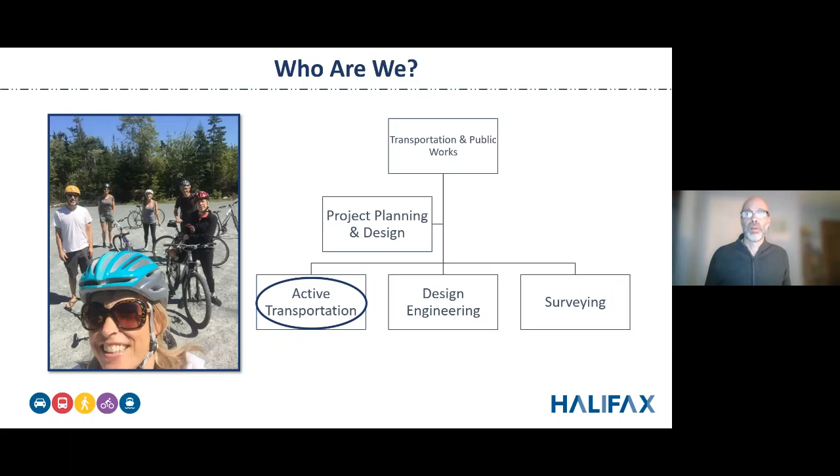Most of our work is directed by regional council. We take our direction from them, and a lot of the actions we're working on right now are recommendations that came out of Halifax's integrated mobility plan. This is a plan aimed at creating a more multimodal city, a city where residents and visitors can get around relatively easily, safely, and conveniently, no matter which mode they choose or that's most convenient for them. The plan really has a focus on sustainability and efficiency, moving our transportation system to become more diverse and sustainable, getting more folks on transit, more people bicycling, more people walking, and making it easier and safer to take those modes.

Just a little bit of description of some of the facility types we're talking about when we're talking about infrastructure that is safer and more comfortable for people to bicycle. This slide gives you the range of facility types, and the engineering design guidance and standards from national transportation engineering organizations have changed quite a bit in just the last 5 years, certainly the last 10, in terms of the types of infrastructure that are recommended and how they're designed.

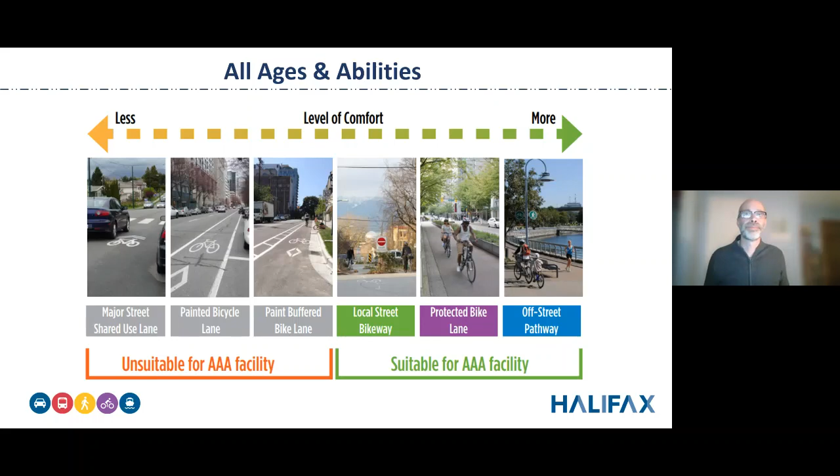Just a few more slides here. Looking at protected bike lanes, we didn't have any of these in Halifax two or three years ago. We are really focusing on getting these types of facilities built on the busier streets in Halifax that are part of our candidate network, and we're trying to do them faster.

One of the ways we're doing them is getting them in on a more, we call it, tactical or temporary basis, using materials like those plastic bollards, sometimes with precast concrete curb, which can go in a little bit faster, is a bit cheaper, and still offers the same level of separation and protection.

In the middle, you have facilities similar to the Hollis Street bike lane and the southern part of South Park, where we put the bike lane in and create that separation using precast concrete curb that comes in and gets placed.

Again, those types of facilities could be there for a while. They're fairly intensive from an infrastructure perspective, but it's an example of the kind of street where, when we come back to do a larger scale rehabilitation of Hollis Street, we would look at changing that arrangement and potentially bringing the bike lane up to sidewalk level or half sidewalk level, and provide the separation that way. But for now, those facilities can be around for a while.

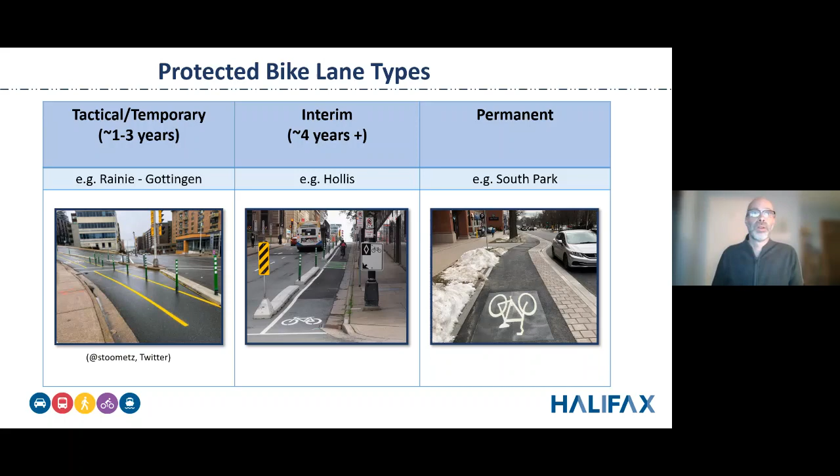Local street bikeways are another facility type that we didn't have any of until recent years, and again these are designed to be safe for all ages and abilities. We have seen them used in other cities, and there's now much better design guidance for them in recent years. The key to these types of facilities is making sure that there are as few cars as possible on the street, so really the types of car use should be just for residents and their visitors. We try to put in measures that dissuade shortcutting vehicles, and also look at traffic calming measures to ensure that the vehicles that are there are going at a fairly slow speed. Looking at intersection crossings is really one of the larger components of these types of facilities.

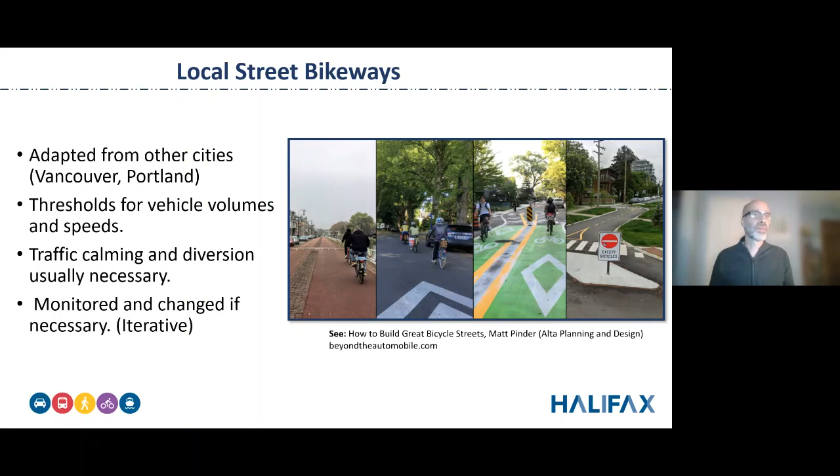So I think this is my last slide. One of our big focuses right now, and a goal and target we have, is to have a network of all ages and abilities bicycle facilities in the regional center, which is the Peninsula of Halifax and Dartmouth, within the circumferential highway. Those green lines represent where we'd like to put the facilities in. About 40% of that network is built now, and I think that's about all I'll say about that one.

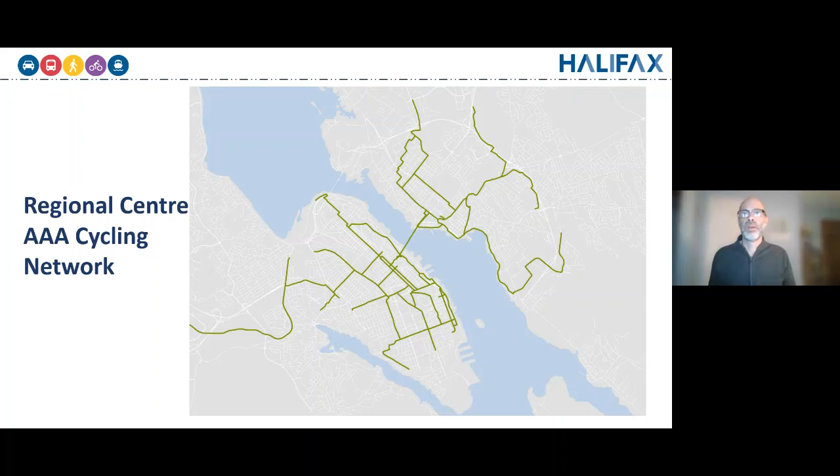You're going to hear a bit about some of the work that Mark Niener's leading to get the southern part of the peninsula planned. And Siobhan Witherby is going to talk about the middle part of the peninsula, the Midtown Bikeways planning process we're working on right now. With that, we're going to get into the meat of the presentation, the more substantive parts. Siobhan Witherby, an active transportation planner in our group, will talk to you about the Midtown Bikeway connections planning process. Thank you very much.

Perfect. Thank you, David. Again, my name is Siobhan Witherby. I am the project manager for the Midtown All Ages and Abilities Bikeway Connections project, co-leading with Mark Niener, who's also on the call here. We're just going to take you through a history of the project to date and where we are now.

Next slide, please. So the objective of the Midtown All Ages and Abilities Bikeway project is to perform functional planning to improve the cycling connections to and through the Halifax Common. This includes upgrading some existing facilities, bike lanes and multi-use pathway facilities, to make them more suitable for all ages and abilities. It includes building new facilities where there are gaps in the network, and also improving the transitions to help move more smoothly through the network. All of this is using a complete streets lens, looking at all road users with a focus on vulnerable road users walking and cycling.

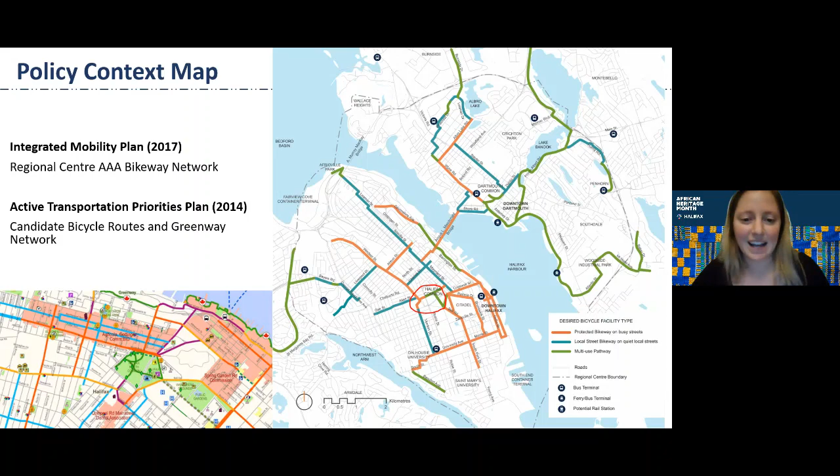So you can see the context of this Midtown All Ages and Abilities Bikeway project. Our focus is on Bell Road, the Commons Pathway, Welsford Street, and Quingate Place, and we have dashed that Quinpool Road connection. So we were investigating whether we needed to enhance one or both of those routes. In yellow are the key intersections for improving the transitions: the intersection of Bell Road, Sackville Street, and South Park; the one of Summer, Trollope and Bell; also Welsford crossing Robie Street and transitioning from Windsor; and the intersection of Vernon, Quinpool, and Quingate.

Just making sure all of those connections are enhanced and allow people to move freely and comfortably through the network. The light blue lines are some of our major existing cycling infrastructure right now: the South Park protected bike lanes it'll connect to, the Vernon Street local street bikeway, the Allen Oak local street bikeway corridor, and also the Windsor Street painted bike lanes. So those are some of our key connections for development. Next slide, please.

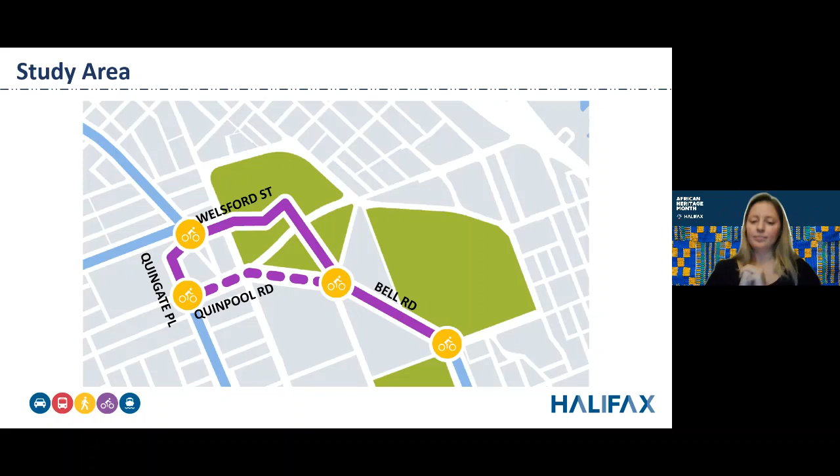So the existing conditions and context, there's quite a range within this center area of the peninsula. There's some on-road routes, some off-road, more recreational style routes, so there's a lot of different context-specific considerations for those.

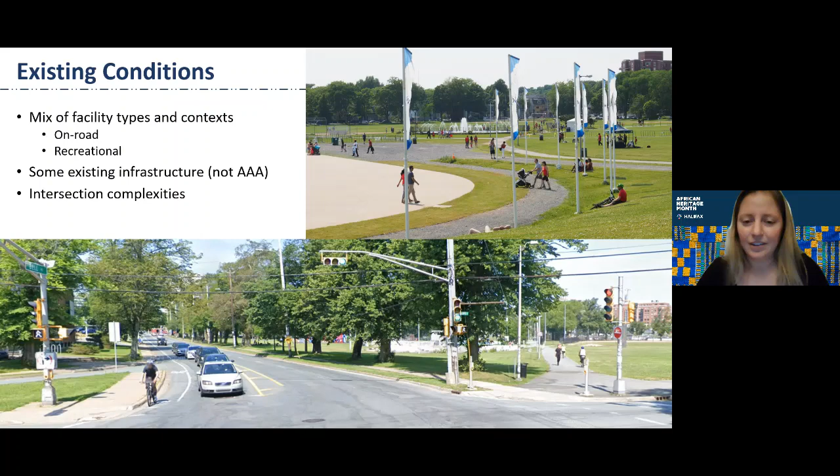There's routes with existing infrastructure, for example Bell Road with the existing painted bike lanes, and then some streets that don't have existing infrastructure, and then considering all of the complex intersections. You can see there are some multi-use pathways that hit a four-way intersection at an angle, and also some offset intersections we need to address.

There are some sharrows on the street transitioning into the local street bikeway context on Vernon. Some very long crossings, like crossing Robie Street to get to Welsford, and the existing multi-use pathway through the back of St. Pat's site. So taking all of these together and coming up with a complete and cohesive plan to move people through this part of the network.

Our key considerations are the type of facility, how we can provide high comfort, low stress, and accessible walking and cycling facilities. Also how we transition between changing types of facilities, getting off a multi-use pathway into some bike lanes, and the considerations for bi-directional versus unidirectional lanes. A lot of these corridors have fairly constrained right-of-way, so we're working with how to fit the desired facilities through there and what some of the trade-offs might be.

We're also considering opportunities to integrate the installation with adjacent developments, for example the QE2 hospital redevelopment site, as well as some sites along Quinpool Road, and addressing those signalized, unsignalized, and offset intersections.

In terms of the project timeline, it was initiated in 2019. We did some existing conditions analysis, stakeholder engagement, and held a public engagement session in the springtime of that year. We've since produced a What We Heard report and have been working a little bit on some more concept development and back and forth with the hospital.

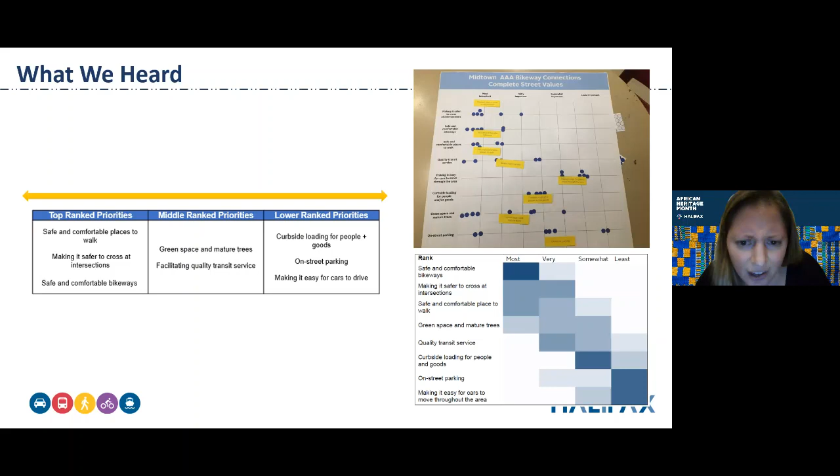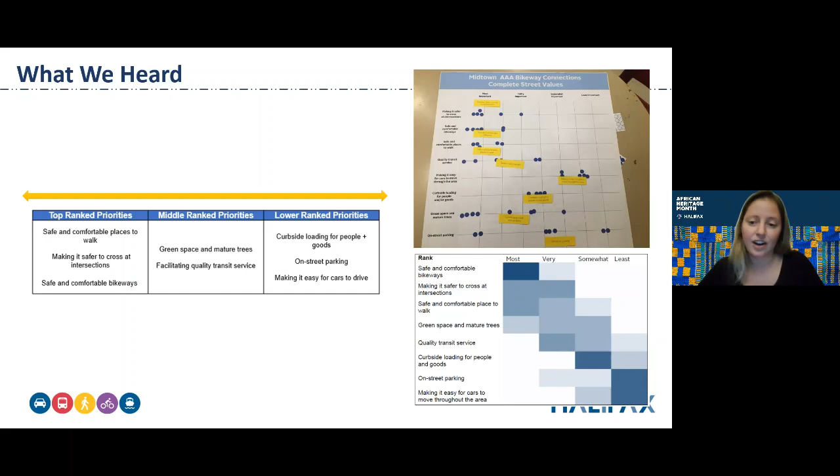In the middle was green space, and then in the lower ranked priorities it was loading and moving goods, on-street parking, and making it easier for cars to drive. So that kind of helps us to frame our weighting and evaluation when we're looking at these trade-offs for the different types of facilities.

We also had some specific questions about folks who are already thinking about the street segments itself and what would make them most comfortable. On Welsford Street, the highest ranked bicycling facility was a bi-directional protected bikeway, and on Bell Road it was unidirectional protected bike lanes.

So we're kind of taking that into account as we develop the concept designs.

When determining whether to do just the Common Welsford route or also add the connection through Bell Road to Quinpool Road, our big question was whether we could make it comfortable enough for people to move through the Willow Tree intersection, which is fairly significant, to a point where they would use it in their daily travel.

We heard from more than half of the folks that they would use both connections, depending on their destinations. That was helpful in giving us the direction to proceed further with planning the Bell Quinpool connection as an alternative route.

Since then, we've been doing some back and forth with Nova Scotia Health Authority regarding the QE2 development. There was a memorandum of understanding signed between the city and the province that designated some extra space on the south side of Bell Road for walking, cycling, and transit. We've been going back and forth with them to see exactly how much space would be available, as that would influence the recommended design for that section.

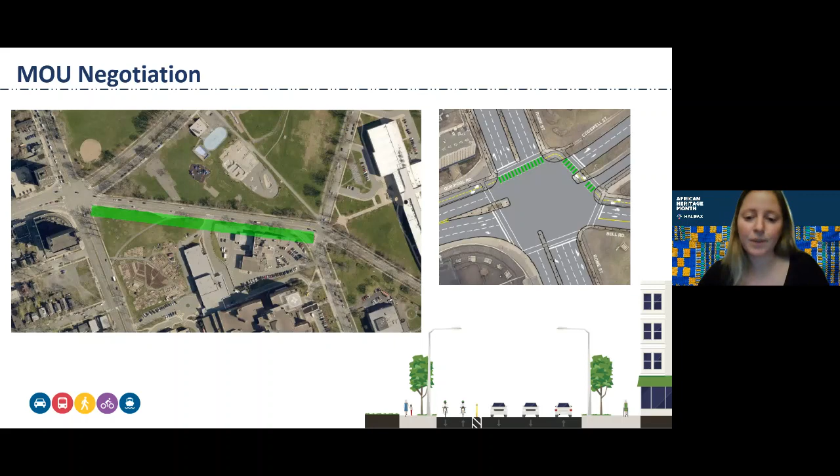In terms of our concept development, you can see on the right some ideas we might be having, but yeah, just developing the bikeway options that balance the trade-offs. We're focusing on the intersections and favoring protected intersections wherever possible, so people can stay on their bikes without dismounting, and can move around the area in as many different ways as possible in a protected way.

We're building on the Halifax Common Master Plan concepts that were just approved by Regional Council, and considering accessibility and incorporating pedestrian improvements.

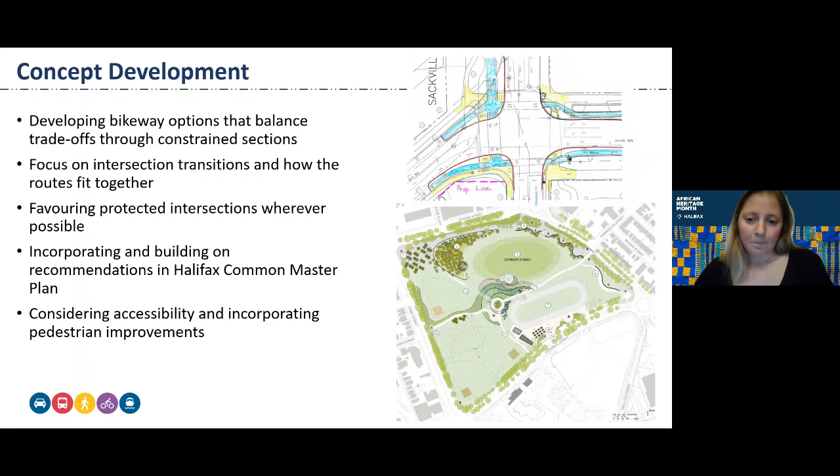Our next step is just finishing up our round of internal stakeholder engagement before we go to the public. Our plan is to host the second round of public engagement in the spring of this year, and then put some concepts on the table for people to look at and choose between options or voice their support if we've captured some of the needs through this area. We'll take that feedback and recommend it to council for implementation.

There are some opportunities to do interim improvements in the meantime. We're looking at the possibility of adding curbs, bollards, paint, and pavement markings to make it safer while we wait for construction of these routes. The permanent implementation is pending council approval.

Because the route is so long and there are a few different sections, there will be a phased implementation, and there are a few moving pieces in terms of integrating with development, especially on Bell Road and Quinpool. So those pieces we may have to wait on timing for.

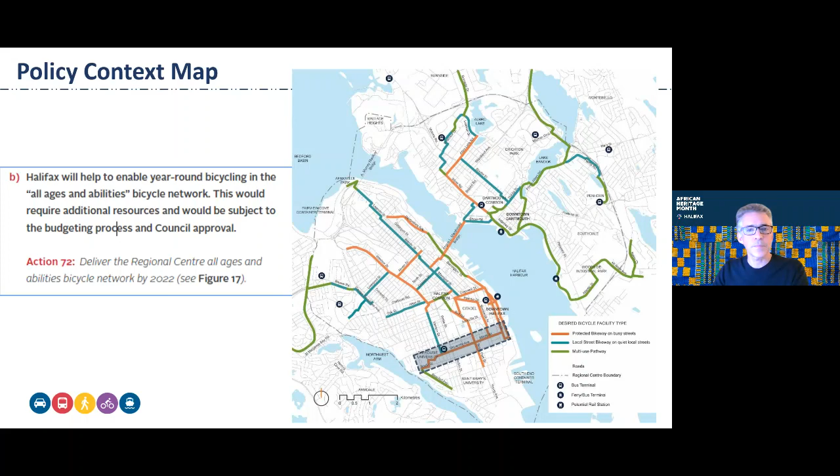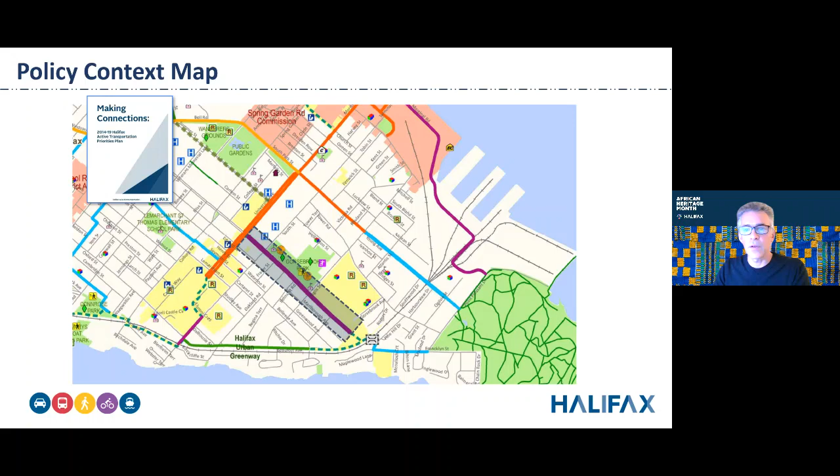Now, the Robie Street connection down to St. Mary's is not part of the IMP network, but it was identified in the 2014 Active Transportation Priorities Plan as a candidate cycling route. Because of the obvious intersection at University and Robie, we felt this was the right opportunity to explore options for that route as well, so we could figure out how ultimately the preferred types of infrastructure would connect at University and Robie. Next slide, please.

So we initiated this process back in 2019. We had our first round of public engagement late that year. Now we are heading into our second phase of public engagement. We've done some route analysis, developed a number of concepts for those routes, and have been evaluating them, working to understand the implications of all of them. We're now preparing to bring all of that information and those concepts to the public this spring. Once we hear from the public and stakeholders, we'll work to finalize the preferred options and bring a recommendation forward to council sometime later in 2022. Next slide, please.

So this is our study area for the project—sometimes referred to as the institutional district, where we find the three campuses of Dalhousie and St. Mary's University. We have the IWK hospital, as well as the VG site as part of the QE2 hospitals. East of South Park, centered on Morris Street, we also have the historic neighborhood of Schmidtville and the Schmidtville Heritage Conservation District. You can see in yellow those endpoints of the corridors that we're trying to connect through with new bicycle facilities.

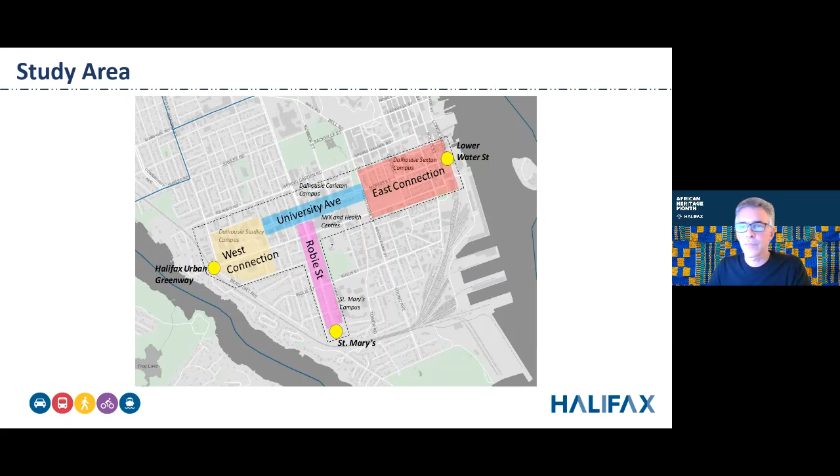For example, proper accessible curb ramps with tactile warning plates - all of those standard features would be installed as part of this project. We'd look to integrate installation of any bike lanes with upgrades to these sidewalks, and likely a full recapitalization of the street, including new sidewalk, new curb where required, and new asphalt where required.

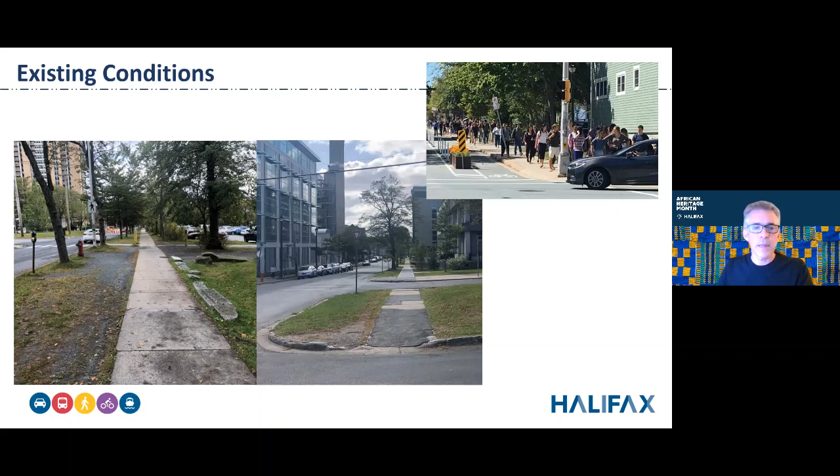For those of you who bike in this part of the peninsula, you're probably familiar with the existing on-street protected bike lanes installed back in 2016 as part of a pilot project initiated by Dalhousie. Following the end of the pilot, HRM took over the facility, and we've just been maintaining it until we're ready to build something more permanent.

During the pilot, there was a lot of work to gather feedback on this facility, and we learned a lot of lessons from the design that are informing the concepts we're developing as part of this project now.

For example, we know that the design of these bike lanes, where there are openings in the barrier mid-block to allow for loading and unloading next to the curb, means vehicles are basically stopping in the bike lane. It's not an effective solution to accommodate loading, and it's not something we would repeat. We're working to accommodate those loading demands without interfering with the cycling facility.

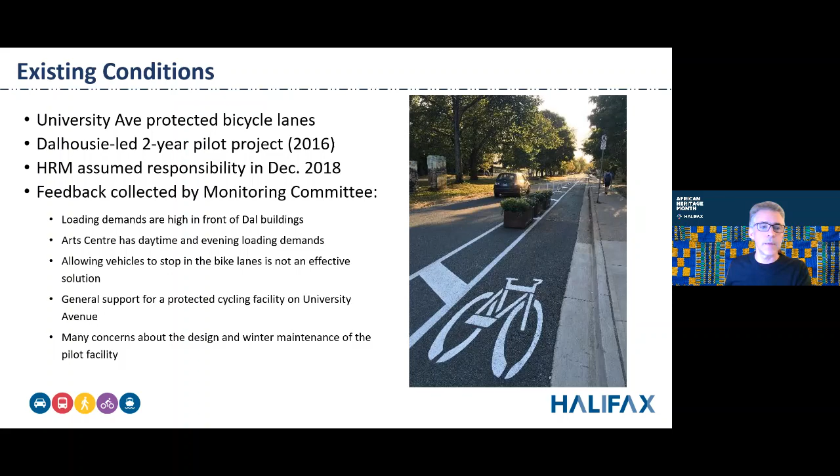Our first round of engagement in 2019 was early in the project. We were asking people to help us understand the existing conditions, how people travel through the area currently, and we started to get into what people's vision was for the future of transportation through the study area.

We hosted two workshops and a number of pop-up sessions at all the Dal campuses and some hospital sites. We also hosted an online survey and interactive map where people could drop pins and leave comments, and had meetings with community-based stakeholders and institutions along the corridor. You can find the summary report on our Shape Your City page - there's a lot of good information in it, and I'd encourage you to check it out if you haven't already.

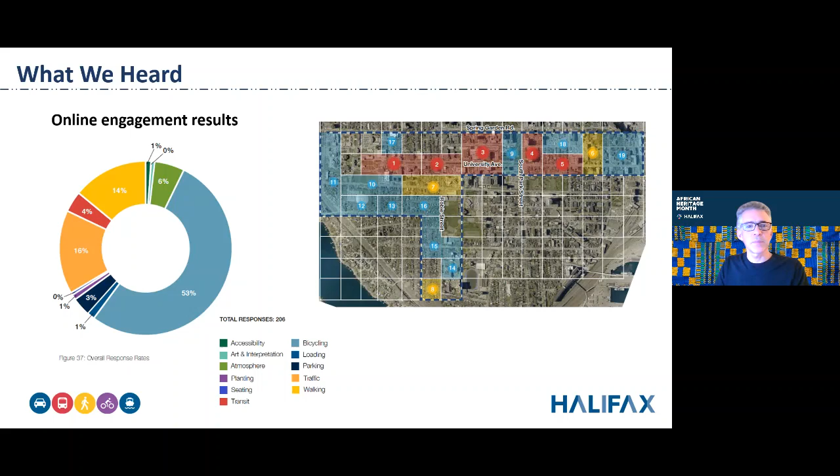Following that first round of public engagement, we got into investigating the route options to make all of these various connections. For the east connection, we've explored 3 possible route alignments: one along Morris Street, which is the route from the IMP and the AT plan. We also, as an alternate, looked at a route along Clyde through the Sexton campus and down Bishop Street. And then we also looked at South Street. Then we've got University Ave and Robie at the middle section there.

And then for the west connection, we also looked at 3 options, including some connections through the Dal Studley campus, along South Street, and along some residential streets south of South. Next slide, please.

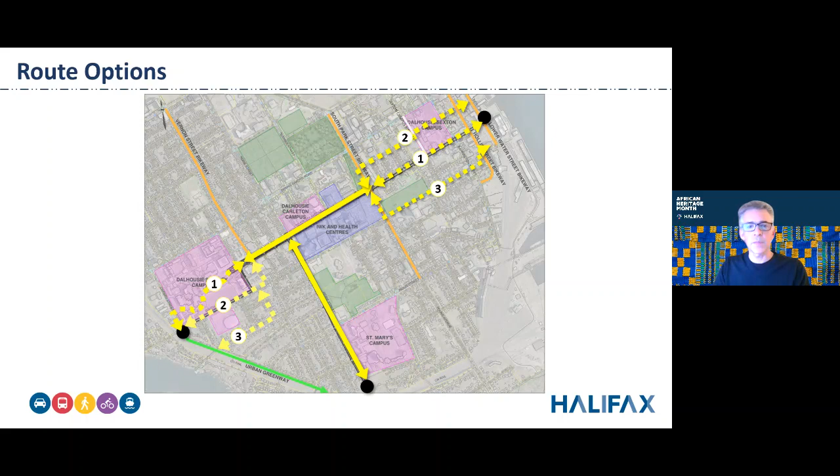We've done quite a lot of work to explore different concepts for all of these routes. We've looked at a total of 10 streets within the study area, and we've done quite a lot of work to understand the implications of these various concepts and evaluate them, and try to narrow the focus a little bit.

So we'll be bringing the top ranking options forward to share with the public. That'll be the focus of our second round of public engagement, although we're going to have information about all of the concepts developed so far available for people to look through. And we'll also see an example of the district identity applied to one block of University Ave as an illustration of how those features might look once constructed on the street.

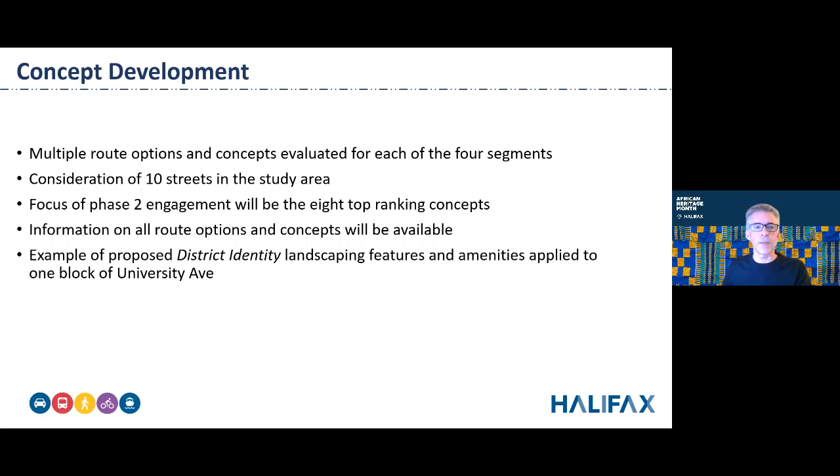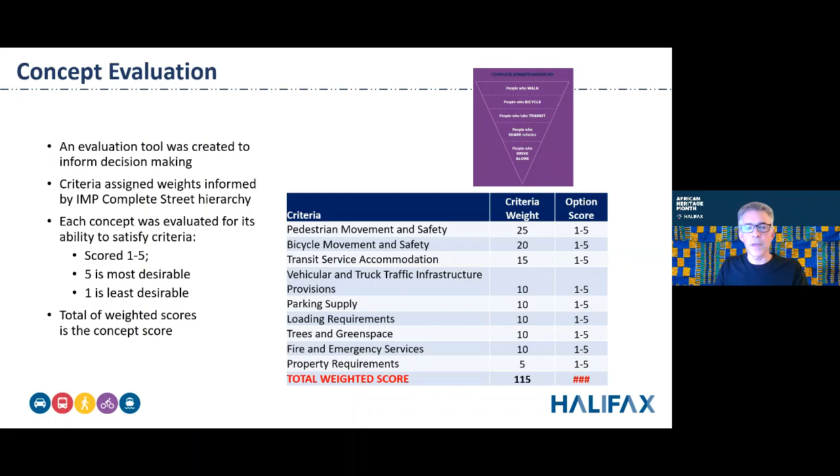So we'll have more time to dig into that when we come back for public engagement. Next slide, please. I think this is my last slide.

There's going to be a variety of ways to engage with the project, starting in March or early April. We are producing 4 short videos that are going to provide an overview of the project and explain the concepts. We're going to again have an online interactive geo survey, basically a map that will place the concepts on a map of the streets, and you'll be able to zoom in and drop pins and make comments and respond to some questions.

We're going to host some small group conversations online. We also, if restrictions allow, would like to do some small in-person events again, but that's going to depend on what the public health measures are at the time. And we're going to have lots of information and our analysis available on the project page.

We also will continue to work with our project advisory committee, which is made up of a number of external stakeholders, including representatives from all of the institutions along the University Ave corridor. And then we will continue to work with our internal technical committee as well, which is comprised of staff from a range of HRM departments. That's my last slide, I think.

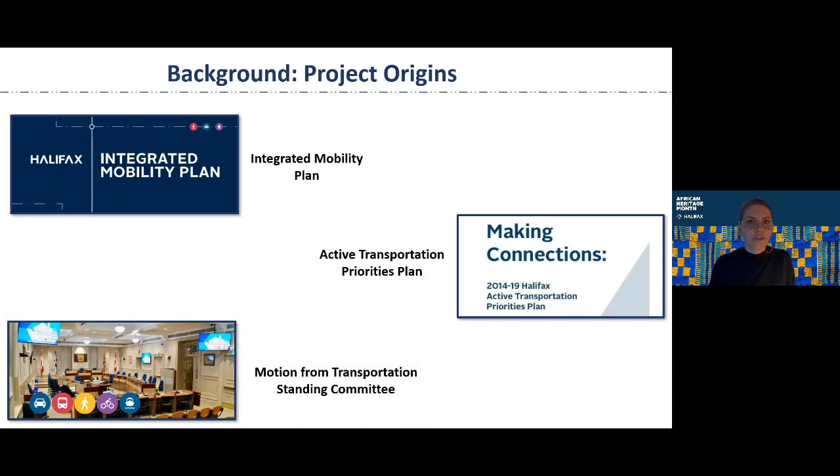So currently, what AT planning looks like in rural HRM: our team is providing grant support to community associations to operate and maintain the multi-use pathways in our rural areas and on provincial land. This is like the rails-to-trails people might be familiar with, St. Margaret's Bay, Atlantic View Trail, things like that. So there are grants available there.

We also have a handful of sidewalks in our rural area that some people might be familiar with - small segments in Upper Tantallon, some in Sheet Harbour that were built in 2010, and in Porter's Lake as well.

And number 3, we do have some provincial and HRM-owned paved shoulders - Hammonds Plains and Sambro are two examples. These have been built on a bit of an ad hoc basis between HRM and the province, as opportunities to add these shoulders come up with different project integration opportunities during road recapitalization or reconstruction.

So what we're currently lacking is a program that would allow us to implement sidewalks in rural centers that would connect people to a cluster of nearby destinations by walking, biking, or rolling.

Another point is we're noticing in the AT team that we're getting a lot more requests from rural communities across the municipality for sidewalks and AT facilities. Right now there's just not a clear program path forward for them to take those requests through a process into implementation. And lastly, working with the province is key when doing any rural work, because the province owns a lot of these right-of-ways, and there are also opportunities for cost sharing and grants.

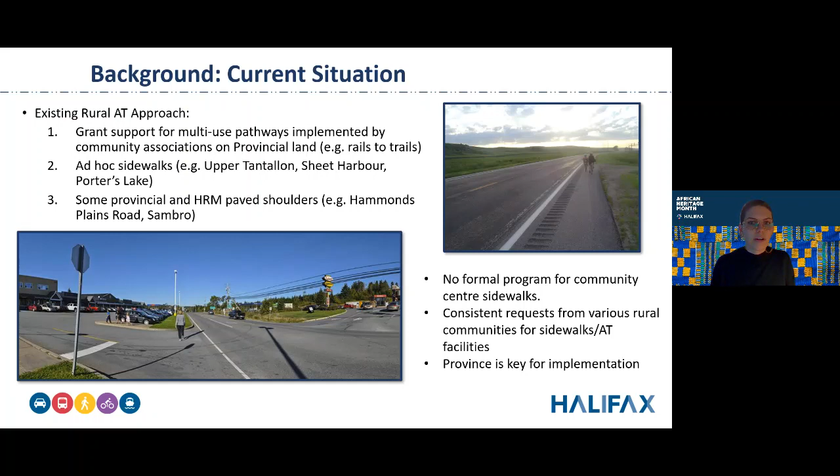Regional plan is more about land uses. Urban service area is about road standards and how we're dealing with servicing for water and wastewater. Urban transit service is about where they're investing in transit in the urban areas.

And then there's tax policy. We discovered that the urban general tax rate pays about 3.3 cents more than the suburban and rural rate, which is the same. Sidewalks are the only difference in that general rate, so that 3.3 cent difference funds sidewalks in the urban area. The suburban and rural areas are not paying that.

So therefore, we decided that the geographic scope of the program should be both the suburban and rural areas. They're both in the same boat with having trouble getting sidewalks implemented due to that funding piece.

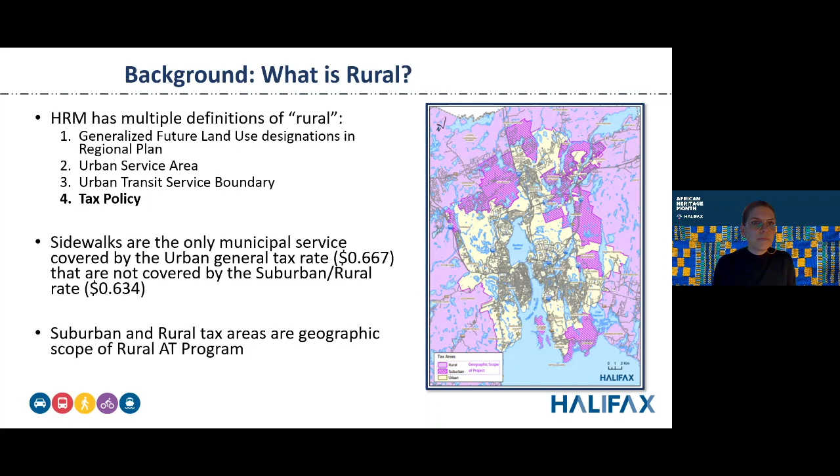This is just a summary of how we developed the program. We worked with WSP - they did a lot of really great work for us. Once they finished up their final reports, HRM staff took that and did further evaluation of how we could implement something like this in the context of HRM.

So as far as the main elements of the program, our top priority is implementing sidewalks within the rural centers. We have a staff report that outlines how staff would like to prioritize communities and make decisions on who we should really focus on first. It recommends a new funding approach for funding these sidewalks.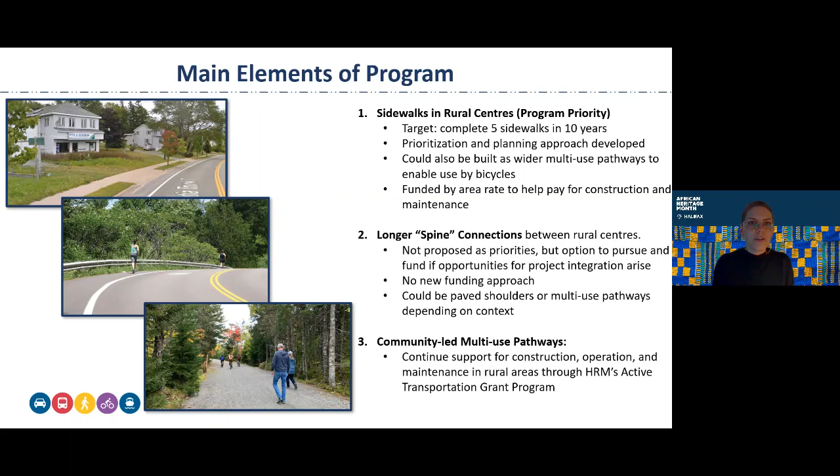On-road connections connecting the rural centers aren't proposed as priorities at this point, but rather as options that we can pursue if we have opportunities to integrate or council direction. We also want to continue our support for community-led multi-use pathways.

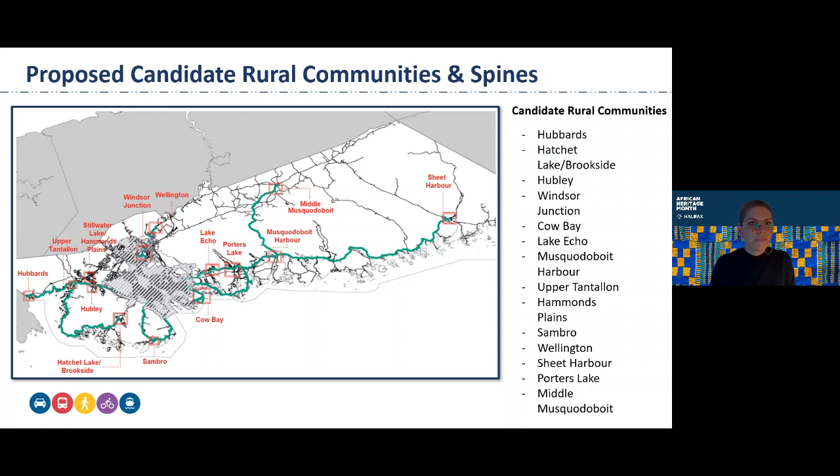So a high-level primer on the funding approach we're looking at: right now we have an area rate administrative order that would allow a community to receive a sidewalk. However, they would be responsible for paying for the cost of building and maintaining it, splitting that cost among property owners on their property tax rate.

The new approach we're recommending is that communities, after they receive their sidewalk, would have an area rate applied on them that would make their rate equal to the urban tax rate, an additional 3.3 cent rate per $100 of their assessed property value.

After analysis of suburban and rural property values, it looks at about $91 per year based on your average single family home. The rate wouldn't be based on the project cost. It's not expected to fully fund most projects and would likely require some general revenue additional funding as well.

We also looked at it from the equity perspective. All the ratepayers in that community would be charged the same rate anywhere in the rural or suburban area after they receive their sidewalks. So it creates predictability for them.